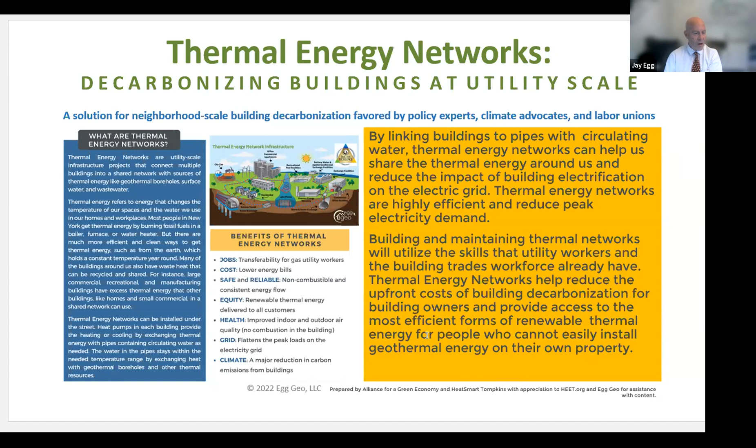I really have to give kudos to Lisa and Jessica Azulay, and everybody on the whole team, the ladies at HEET, which is the Home Energy Efficiency Team, that would be Audrey Schulman and Zeyneb Magavi. They all got together and put together a one-pager that explains to the public what thermal energy networks are. I would love to read this whole thing to you, but you can get this handout, a single pager, right off their website when you go to the Alliance for a Green Economy, HeatSmart Tompkins. It's just a great way to explain it.

Where I really began to know this was starting to take off was not only what was going on in Massachusetts, but earlier this year, on February 15th, Christy Egg and I went with several of the business managers of the UA locals in New York. We toured a large central energy plant in Manhattan, and we went to Long Island and toured a university campus, all of which were being converted with the help of NYSERDA and other public funds to thermal energy networks.

While we were doing that, I was amazed, first of all, that we had the interest of the unions. And here's the reason why. As we're decarbonizing our buildings and so forth, all that a lot of people see is that the boilers and the furnaces are going to be turned into some type of electric devices like electric heat pumps.

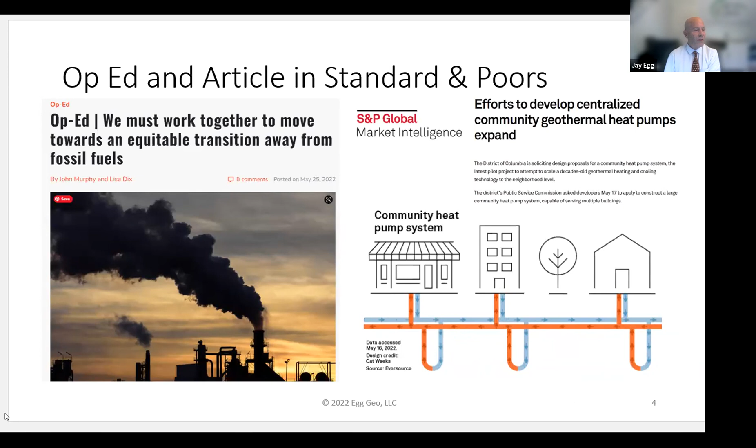What they realized when they looked through this thermal energy network idea was that not only is the thermal energy network a solution to not having to drill holes everywhere, but it's also a pipe solution, which is going to require a lot of skilled labor to put these pipes in the ground.

When you think about these pipes in the ground, it's important to remember that the naysayers' first thing they say is, oh my goodness, do you realize how much infrastructure that takes? Well, we've been through it many times before. In case you don't know it, before the 1950s, there really wasn't any piped infrastructure for natural gas. But during the Second World War, we had to pipe a lot of oil from Texas to New York, and we realized we could pipe natural gas. So during the 50s and 60s, 2.5 million miles of natural gas infrastructure was put in the ground. We can do that again.

And here's the beauty: that infrastructure can follow the same pipelines we already have in the ground. It's so fun to look at this kind of graphic chart and see that a thermal energy network is very similar to a natural gas network. Both of these infrastructures require pipe in the ground. Both of them have a utilization technology that looks somewhat similar.

It's just that with natural gas, it's a furnace or boiler at 95% efficiency at the very best. With a geothermal energy network, it's a heat pump that has 300% efficiency or better, even up to 500% or more. And a geothermal energy network provides both heating and cooling. What have we learned recently from climate change? Air conditioning is almost as important for health and human safety as heat is, because it's treacherous out there.

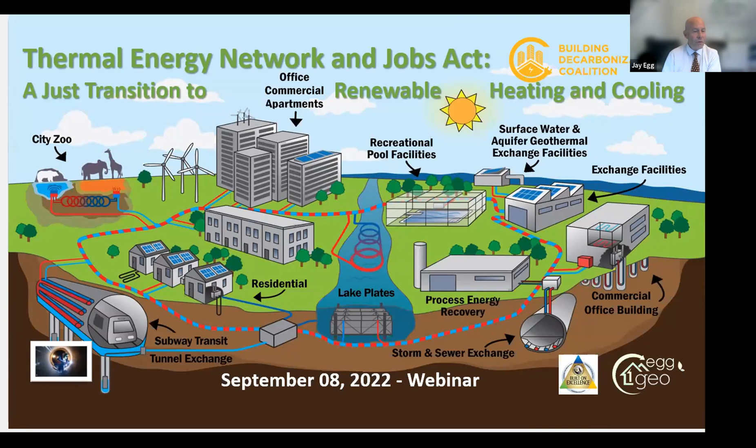The difference is in the energy input. The energy input is all of these things: surface water, wastewater, existing infrastructure. There's never a situation where you have to burn something like natural gas. You can, but you don't have to. It can all be gained from thermal energy infrastructure or from burning hydrogen or some other cleaner fuel. So we have an energy input that's earth exchange.

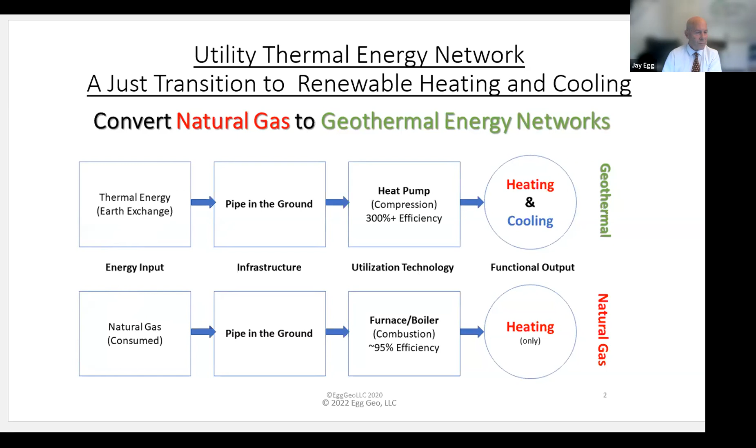When we do that, we end up with a whole city-based infrastructure that's taking advantage of the waste heat from the data centers and the commercial buildings, and that can be absorbed by the apartment buildings and so forth. And we can end up with a fully integrated network sharing energy.

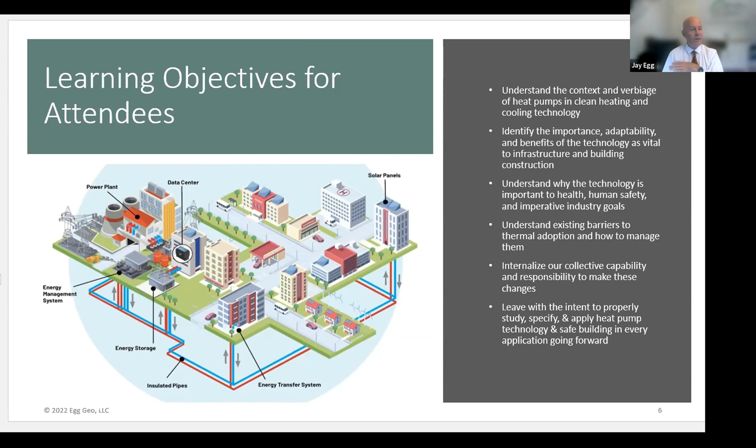When you look at the energy efficiency of a thermal energy network, it's just like a synergy. And we all know what synergy means. Two people coming together with a great idea can produce more work than the two of them separately. That's the synergy of these buildings. Putting more buildings together, instead of 3 or 4 or 500% efficiency, we can get 900 or 1,000%. Practically, you can never quite get to perpetual motion on this, but very close. We get to the point where we're just moving energy around much of the time. And it's a beautiful thing.

So instead of wasted heat, like I talked about, with all this heat going out the cooling towers of our commercial buildings, and not tapping into other infrastructure resources that we have, we can do a recycled heat thing here, where we take extra energy from the data centers, the universities, the factories, the wastewater, and use that in our residential buildings for domestic hot water and comfort heating in the wintertime. And we can reject all of that heat to surface water or down into the ground or wherever we want to during the summer months.

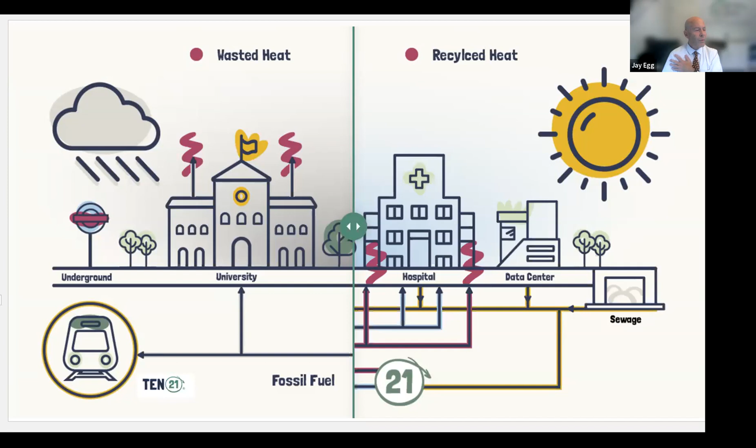When you look at the types of heat pumps, it's important to realize air source heat pumps are such a friend to the industry, as are geothermal heat pumps. The main difference between the two is a geothermal heat pump is coupled with the earth or with a thermal energy network, where an air source heat pump is coupled with the outdoor air.

Whether you're exchanging heat with the outdoor air or the earth, the same fact holds true: it is renewable energy. The outside air is going to get all mixed up with the atmosphere. Whether you're rejecting heat to it or pulling heat from it, it's renewable, recharged by solar energy. And the same thing is true with the earth. It's a massive, massive heat source and heat sink.

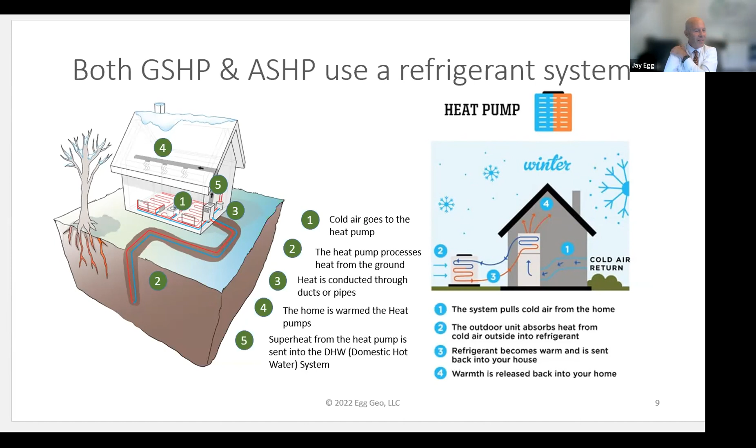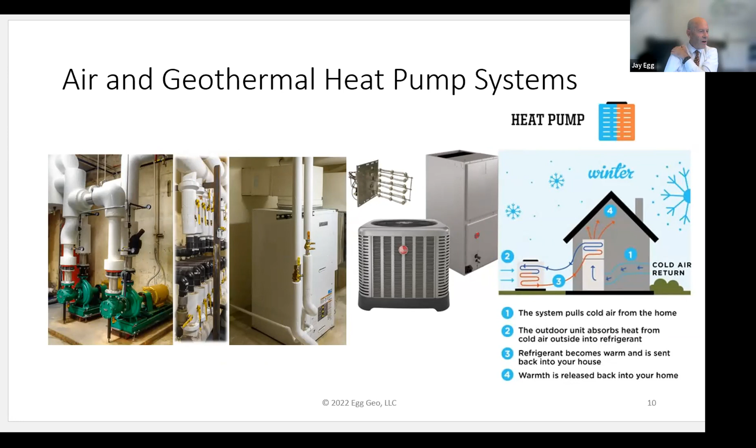So when you look at these in this illustration, and then you look at them in real life, it makes more sense. This is a split air source heat pump system that uses an air handler inside the space and a condenser outside, where a building with a geothermal heat pump uses a unitary heat pump that has both the compressor section and the air handling section all in one. So when you look at it side by side, it's just this: either you're exchanging heat with the outdoor air or you're exchanging heat with the ground. And that's really all there is to it.

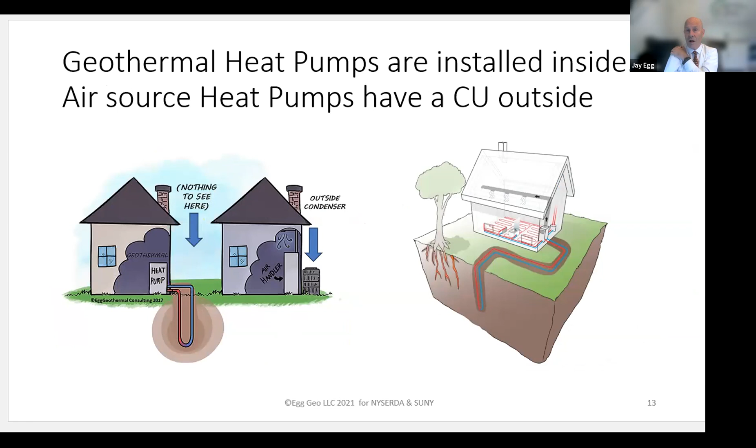Then when you let a couple of engineers get involved, that's when you have to watch out. That's when it gets wonky, because we do things like this that really work, by the way. We say, wait a minute, okay, we have a heat pump that can use any source now because it's now water source.

Can we use solar thermal arrays to recharge it? Sure you can. Can you use wastewater to recharge it? Yes, you can. No matter if it's 0 degrees or 40 degrees or 100 degrees outside, guess what? With wastewater, it's always about 70 to 80 degrees. So it's a great heat source and heat sink year round. Whether we're heating our building or chilling our building, we can use all of these hybrid variations to make things happen.

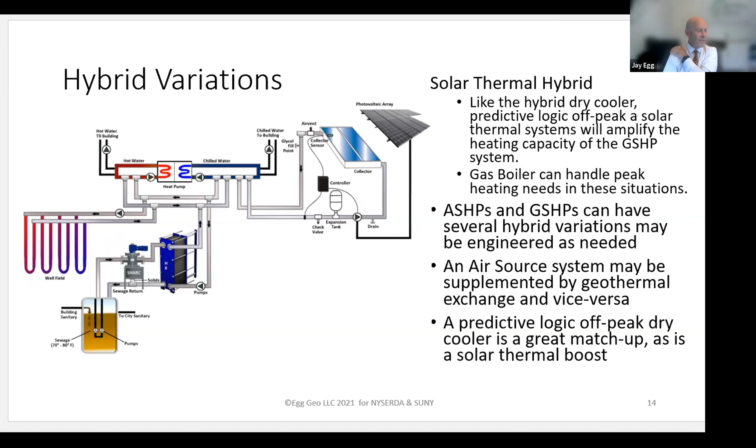So as we look at this in practice, it gets really big. And that's what's cool.

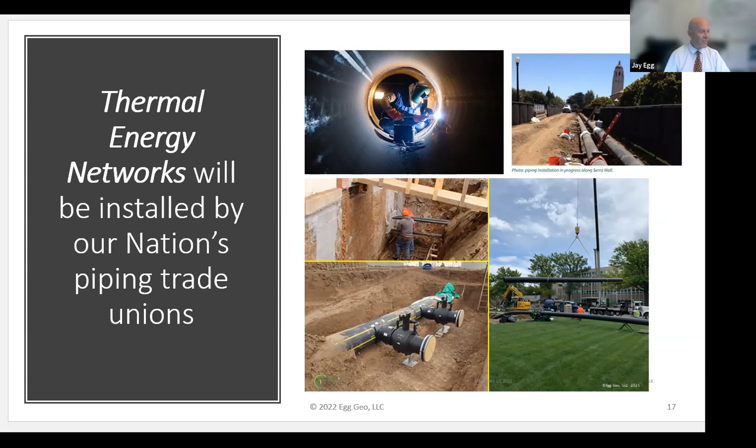These are images also from Stanford, showing taps off of a thermal energy network. These two taps off of this 24-inch line, which are 10 inches each, can serve an entire high-rise rated at about 300 tons just by tapping in there and exchanging energy. So no matter what type of rework you're doing, it works.

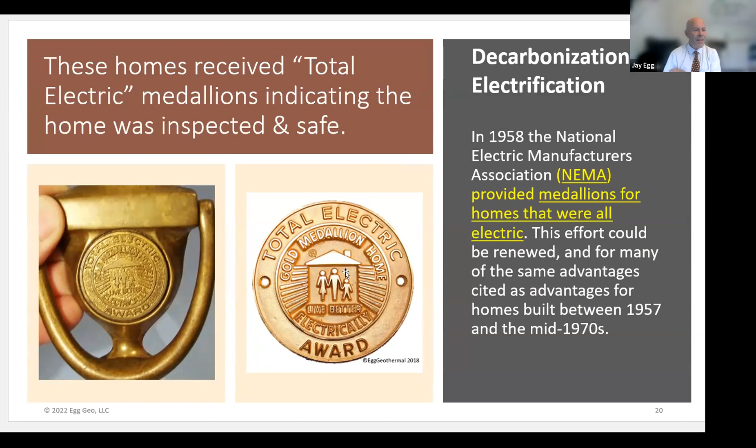The funny thing is that in 1958, while we were building our natural gas pipeline, the National Electric Manufacturers Association got together and pulled in a spokesman, Ronald Reagan, to promote all-electric living because they said it was healthier. Well, the natural gas line still went in, but I love these medallions they came out with to give awards—you'd put them on the outside doorpost, and it said 'Total Electric Gold Medallion Home.' That's what we're coming back to. We're doing something the same way.

Here is where you get to do a side-by-side comparison. As I said, air source heat pumps and geothermal heat pumps are both essential parts of our all-electric decarbonization revolution. But it's important to know the limitations and why governments are invested in both air source heat pumps and geothermal heat pumps. Here's why.

In 2010, ASHRAE headquarters, one of the governing bodies of the air conditioning and heating industries—arguably the largest—decided, during a retrofit, to install all air source heat pumps on the first floor of their building, and all geothermal heat pumps on the second floor. Corrected by square footage and kilowatts, they did this analysis of their facilities. What you see here is important, not to say one is better than the other—that's not what we're here for. We're here to talk about what the reality is of these things.

Sure, it's more expensive to do a geothermal system, but these systems reduce your peak energy consumption and your energy bills. You hear a lot of screaming in the industry about electrification, because naysayers say it will ruin the electric grid profile. If it's all air source and you're doing it in super cold climates—even Atlanta saw huge spikes in January, February, March, and December for wintertime—why would that be? It's really simple, it's not even a fair comparison. If it's below freezing outside and it's 60 degrees down in the ground, which heat pump has the advantage? Well, of course, the geothermal heat pump does.

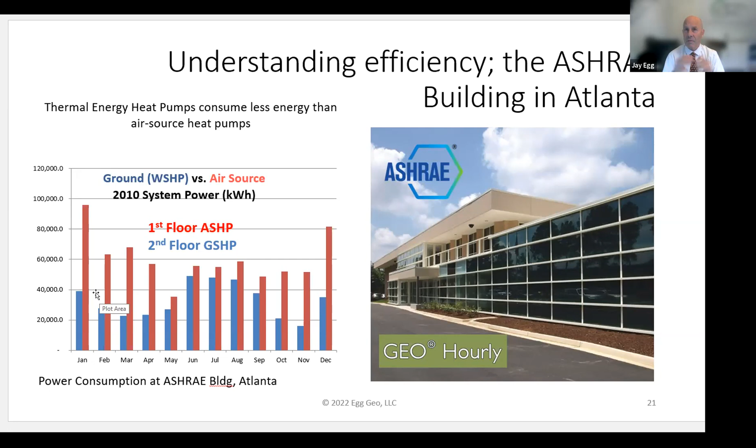That's why in certain places we need geothermal heat pumps. You can see in this example, their summer peak for June, July, and August is so high that the winter peak doesn't even approach it. What does that tell you? It tells you that the screaming and crying we hear about ruining the electric grid if we go all-electric is not going to be the case if we have a good mix of geothermal heat pumps, afforded by using thermal energy networks.

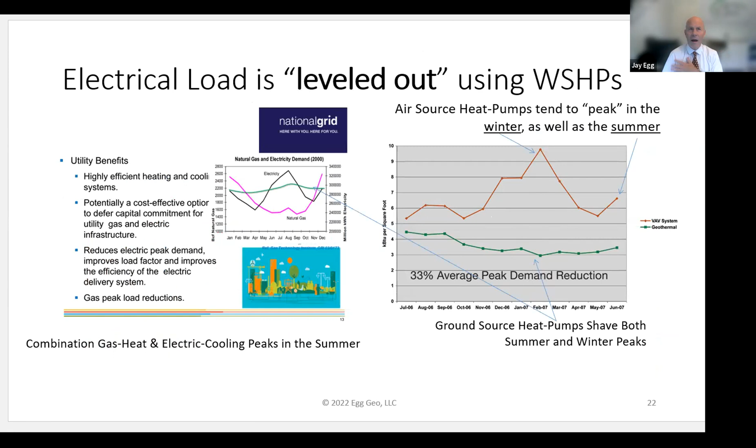Over and over again, in side-by-side comparisons, geothermal heat pumps outperform air source heat pumps because they're coupled to the ground. You just can't put a geothermal heat pump everywhere yet. The magic of how this is done: when you're electrifying a building, 1 kilowatt through an electric space heater gives you 3,412 BTUs of heat. But 1 kilowatt through a geothermal heat pump gives you 17,000 BTUs of heat. That's because a heat pump uses that 1 kilowatt to run a pump that takes that energy and pumps 4 more kilowatts out of the ground to give you those 17,000 BTUs. Is it getting clearer how we can electrify the grid, electrify our buildings, and not ruin the grid?

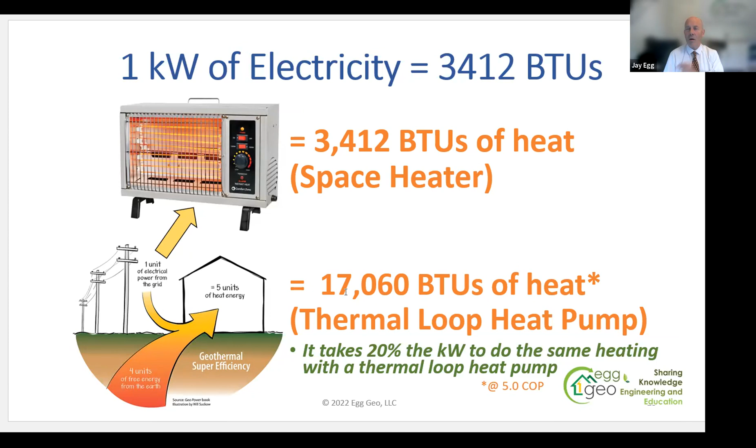In Canada, they hired Dunsky to do a performance evaluation of what would happen if they shut off all their natural gas and invested in Ontario's consumer infrastructure to help everybody go to either air source heat pumps or geothermal heat pumps. They found it would cost $435 billion to help all of Ontario go to air source, or $572 billion to go to geothermal.

They found that carried out over 30 years there would be electric savings for consumers. That was a plus, but here's the real plus: power generation and transmission costs decreased as geothermal heat pumps helped reduce peak load impacts, saving Ontario infrastructure $494 to $500 billion.

And Ontario doesn't even have the population, I think, of New York City proper—maybe 15 or 17 million, something like that. I'm probably completely wrong because I'm not really good at that.

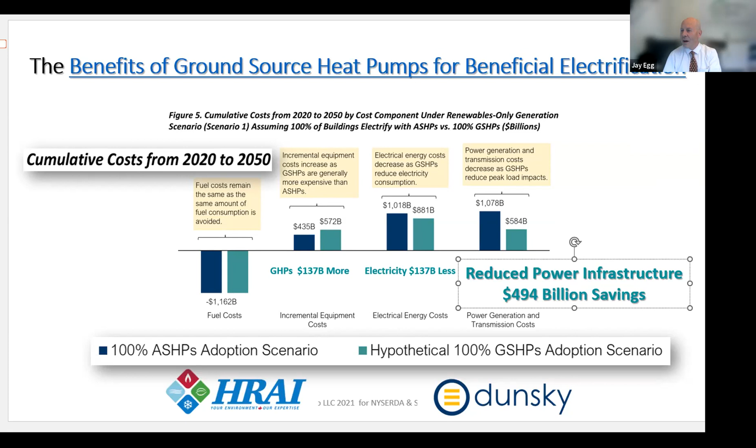Sounds good, Jay. All right, going to unshare. You gotta figure out how to do it now. I feel like I'm getting so new... It says—it's funny, I usually see my share button, but I don't see it. There it is, stop share. Got it, took me a minute.

Awesome. All right, well I was monitoring the chat a little bit while you were speaking, and I wanted to bring a couple of questions. The one I really wanted to start with is this basic question of feasibility. There are naysayers who say the thermal energy network systems are not tested, not tested at scale. Since you've been working for so many years globally on thermal energy networks, I wanted you to give everyone a flavor of where these systems are and talk about the feasibility at scale. Is this being done? Is this brand new?

You bet. First of all, it's not really publicized because the communities, cities, and countries that have adopted this in Europe, and even domestically, haven't made a big deal about it—there's not a lot to see. We had some of the same naysaying when we started the natural gas rollout: how are you going to get this to all the buildings? It's pretty much the same infrastructure as a natural gas rollout. Every engineering question was resolved, especially in retrofit situations.

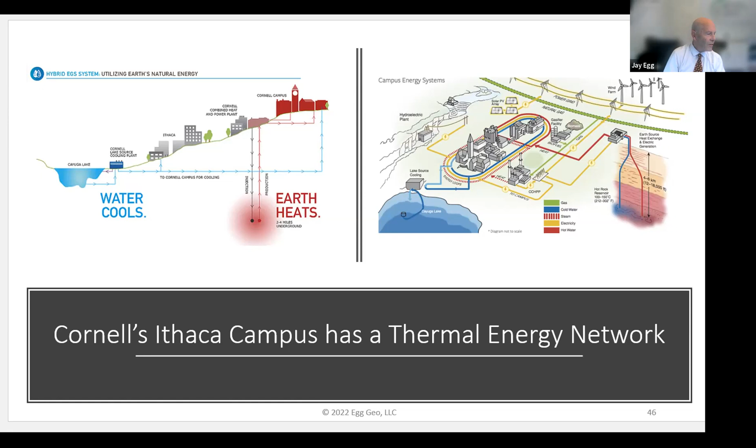This is what HEET did. I really want to share this, so bear with me. HEET did a study, and it showed how they can use the existing right-of-way, just like where the natural gas is already, and they can use the same pipe fitters and need even more of them, just retraining them over to connecting geothermal pipe to the buildings. Why is there more work? Because not only do they have to connect to the domestic hot water and the furnace, but they also have to connect the air conditioner. And eventually it's going to be the refrigerators and everything that creates and removes heat in the building. So thank you for asking that. I get so excited about that, because it's not only more jobs, it's a lot more jobs for a lot longer time.

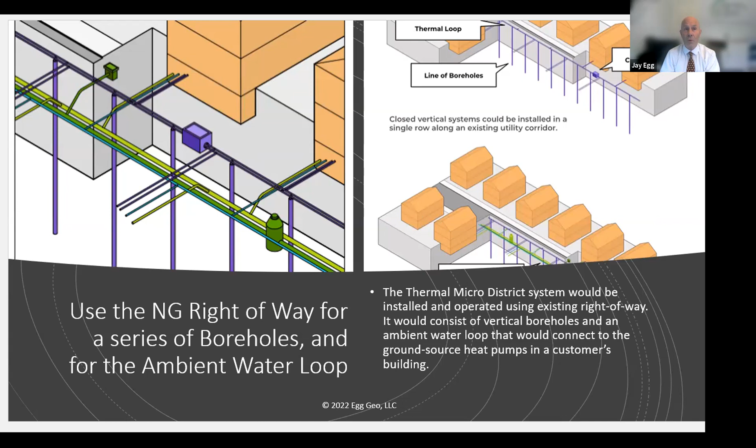I wanted to see if there are any more burning questions in the chat that I may have missed. There's a great chat going on, lots of people talking and answering each other's questions, which is fantastic. But one question has come up a couple times: the idea that this thermal energy network has to be piped to each individual's apartment or house, and there's a little confusion there. Could you explain how maybe we already have the system to connect into this network, or do we have to build it much more extensively to each person's home? That's a really good question.

It's literally like us getting a new fiber optic network — we don't have to connect into it, but we can. So what we end up with is what looks like a water box in the front of our yard. If we decide we want to put in a geothermal heat pump and take advantage of the huge rebates, the electric company or energy company comes out, and two pipes, just like sprinkler pipes — 2 3/4-inch lines — run it right up, stub it right into your unit, and you're done. You have your air conditioning and heating for the rest of your life. It's so simple, it's not even funny.